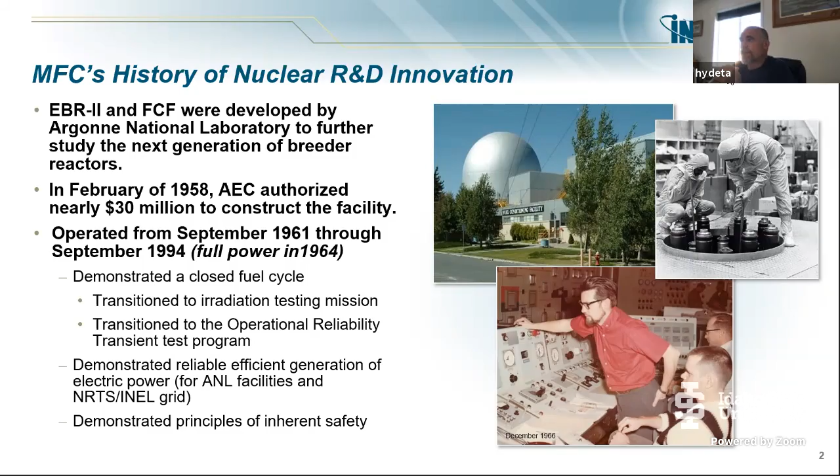Pre-COVID, when we were fully operational, there were between 800 and 1,000 people that come to work at MFC each day. And they range from the guards that need to be there because of the nuclear material that's present, through the technicians, all the way through the scientists. And because it's effectively a mini municipality, so a little city out in the desert, you've got all of the infrastructure you need to support people living out there for part of the day. So anywhere from water, sewer, food, etc. So that gives you a little bit of background about what is there.

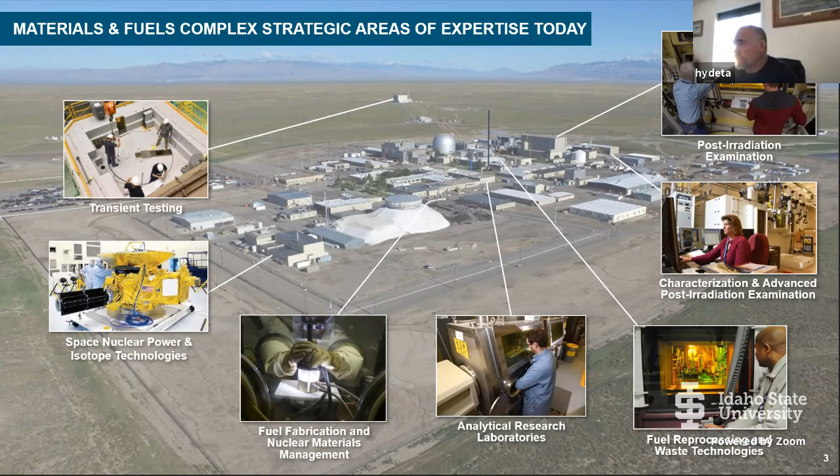So go ahead and jump to the next slide. And I would encourage, if I'm too detailed, please give me some feedback on what you're interested in. So ask questions as I'm talking here.

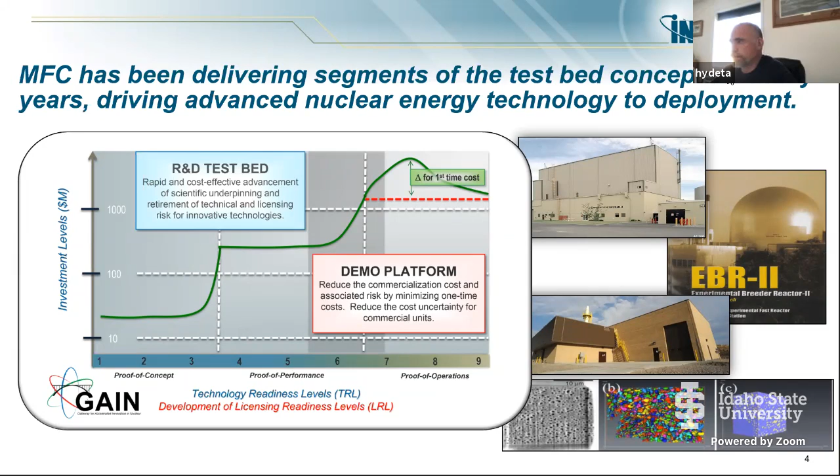Go ahead and jump to the next.

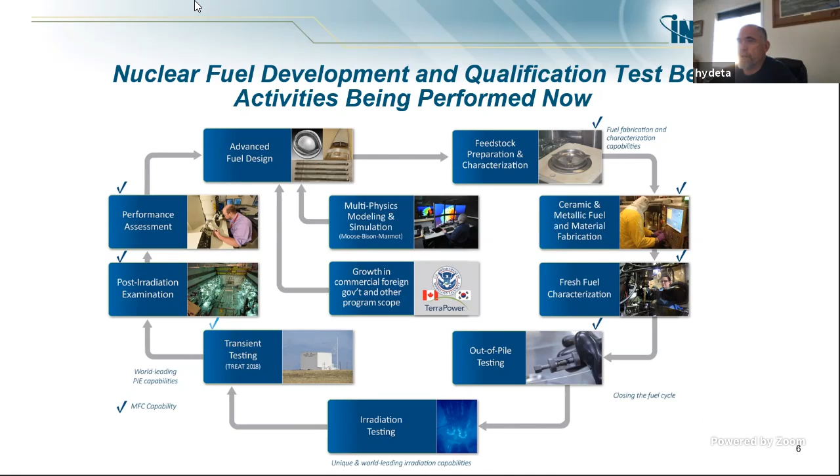In my division and in a lot of the other divisions, people work side by side, independent of their educational background or their title, be it technician, engineer, or scientist. And where a lot of the hands-on work comes in for this area in my division is there's some challenges when you set these things up in glove boxes. It's one thing to do it on a bench top.

So when you transition into a glove box, we use a lot of technical expertise from our technician staff to, well, let's test it on a bench top. And then based on our experience, we know we've got to adjust this or put a bigger handle here or something here so that when we do put it into a glove box, it's much easier to function and operate. Go ahead and jump to the next slide.

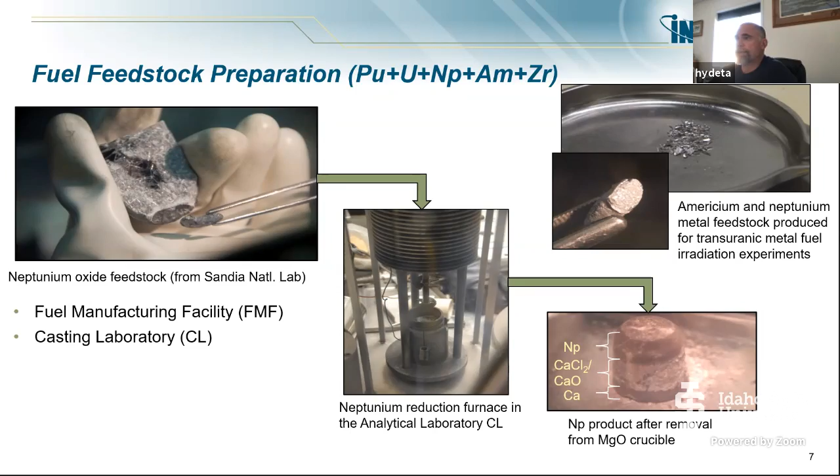And so the people that perform work in that building, there are a lot of operators, to use the words that you, Mackenzie, talked about. There's probably 10 operators that work in that facility, several engineers, and then the facility managers. Everybody that can go in and out of that facility has a Q clearance. And then we are also on a program that's called HRP, Human Reliability Program.

So we are subjected to significantly increased random drug and alcohol testing, and then yearly psychological and more in-depth physical exams than the average employee. And that's just the process that we have to go through to allow access or validation that people can be trusted to be around that quantity of nuclear material.

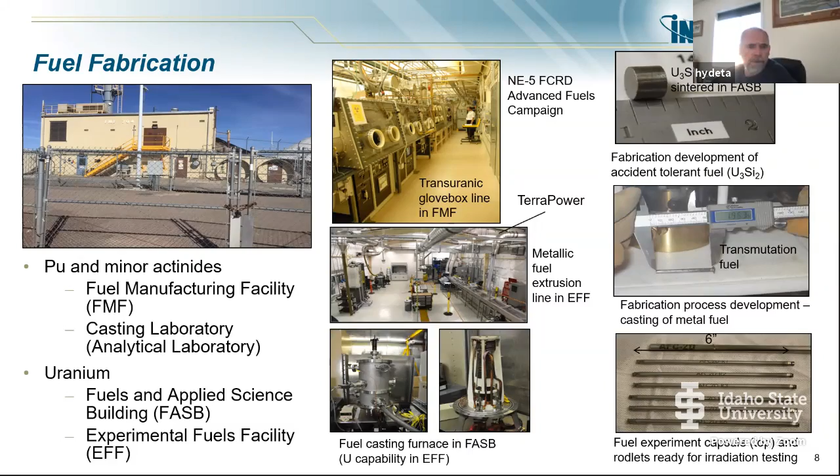And then the pictures below are a furnace system. So it's the ability to heat and melt uranium, in this case uranium alloys, and then cast them into whatever it is that we need. Again, all of the work that goes on in those facilities, setting up those systems, running those systems, is a combination of technician and engineer. Go ahead and jump to the next slide.

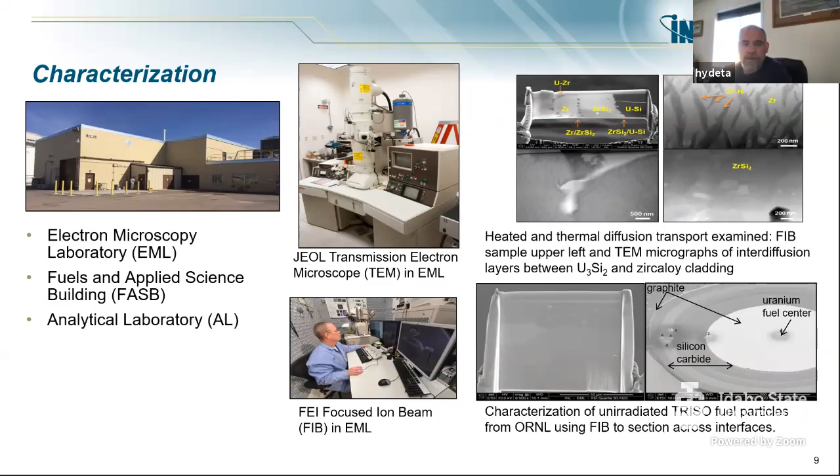This one doesn't talk to it too much, but all of the characterization work is actually a combination of technician and scientist. This one doesn't have a lot relative to, I'll say, the traditional mental picture of what a technician or an operator would do. But to run those facilities takes operations expertise, and moving samples and helping some of the scientists always takes some sort of technical assistant and technician support. Go ahead and jump to the next slide.

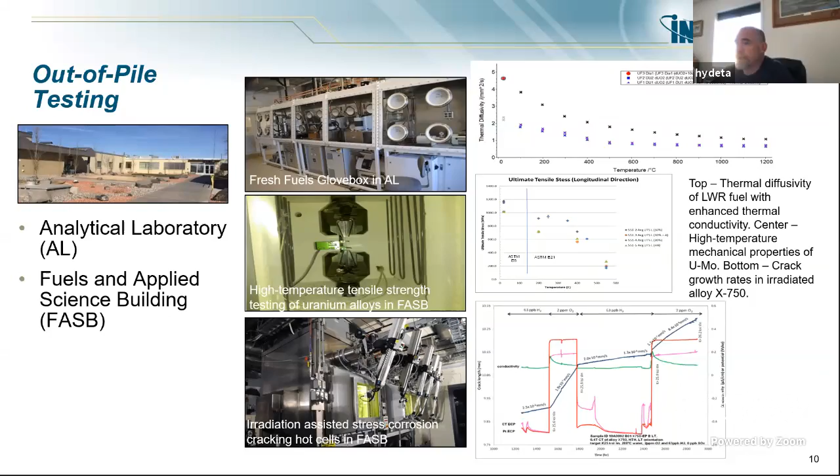Another point, given where we are living now, those particular hot cells were actually fabricated at Premier quite a few years back, and those were significant. A significant amount of those were actually made locally. Go ahead and jump to the next slide.

We are actually just about out of time. Sorry. Up to some student questions. Do you want to quickly go through the last slides? What would you like to do? Let me go ahead and jump through the slides and see if there's something that might be helpful if I talk to, and then we'll just open it up to questions. Okay, you want me to go to the next one then? Yeah.

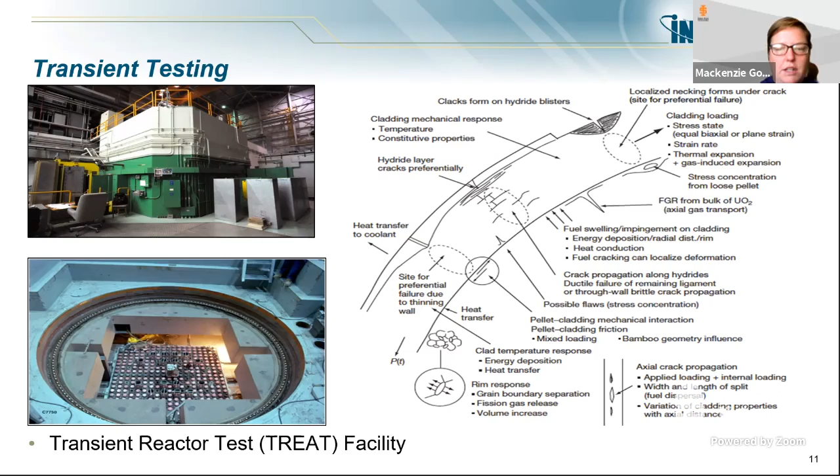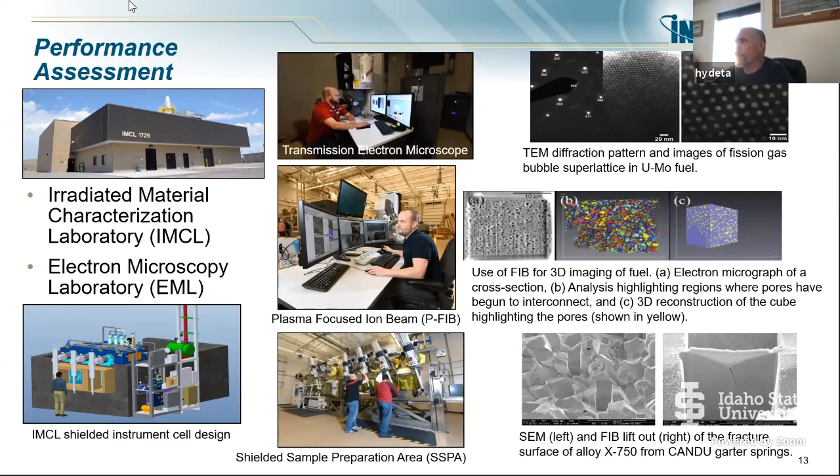So there's nothing, that's just the inside of the hot cell. And you've seen HFEF, and HFEF is run largely by operators. You can see people again running a hot cell in there. Go ahead and jump through, trying to refresh myself if there was something that might make more sense from your all's perspective.

I guess not. One note here is that right at the moment, that SSPA facility is literally under construction. And that will be a new facility that has hot cells in it that, again, are going to need a wide range of technical expertise, from operator, technician through scientist, to run.

So I'll open it up. Go ahead, what questions, or did it elicit any questions?

On a couple of your slides, I saw the phrase TerraPower. Is that the Bill Gates TerraPower or something else? No, you are correct. It is the Bill Gates TerraPower. He's the primary financial backer of TerraPower, but not the only individual of that scale of resources. But yes, that is that entity.

Thank you. And they are continuing to look at EBR-II type fast reactor technologies. And then they now have a thrust to look at molten salt reactor technologies that are all underneath TerraPower.